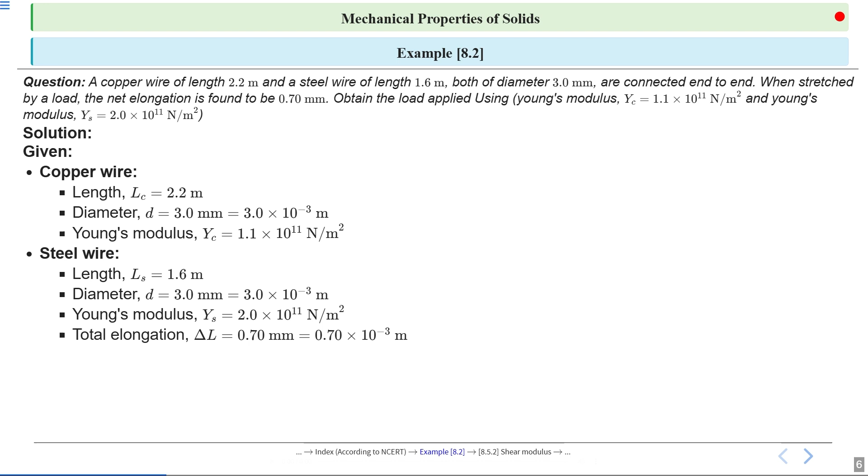Total elongation delta L is equal to 0.70 mm, so in meter it will be 0.70 into 10 raised to the power minus 3 meter. Alright.

So here end to end means the end of the copper wire is connected with end of the steel wire. Alright, end to end connection means both ends of the steel wire and the copper wire are connected to each other. Let's define the force applied to the wires, we will call this F. This is the load that is causing both wires to stretch. It's important to keep in mind that this same force acts through both wires since they are connected in series.

So recall the formula for longitudinal stress. We know stress is defined as force divided by area. So stress is equal to force upon area, where F is the force in newtons and A is the cross-sectional area in square meters. This formula helps us relate the applied force to the internal forces within the wire.

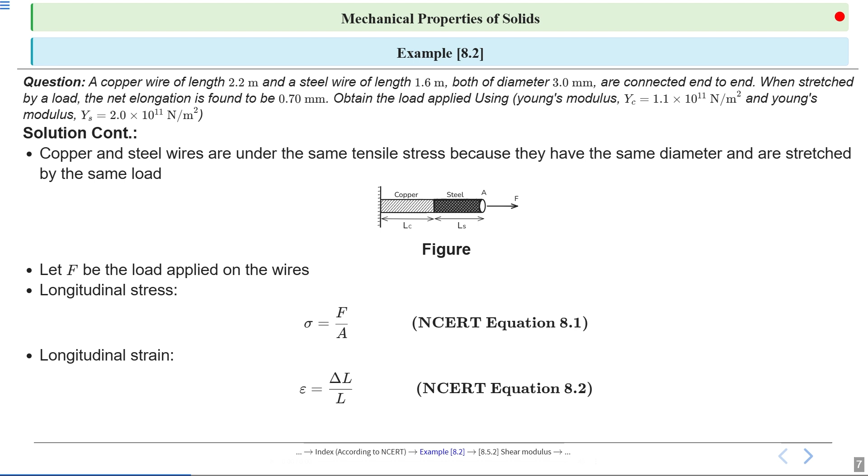Alright, we are continuing with the solution. Cross sectional area A equal to pi into d by 2 whole square. Since both wires have the same diameter, here d is the diameter, so just divide by 2 and put the value, you will get the area.

Substituting the values, A equal to pi into 3.0 into 10 raised to the power minus 3 meter divided by 2 whole square. Solving this, you will get A is equal to pi into 1.5 into 10 raised to the power minus 3 meter whole square.

So solving this, you will get 7.07 into 10 raised to the power minus 6 meter square. This value will be used in the next steps to find the load.

Alright. Now cross sectional area is same for both wires. The ratio of stress to strain is given by stress upon strain is equal to Y. So we have the formula: stress divided by strain equals Young's modulus, or sigma over epsilon.

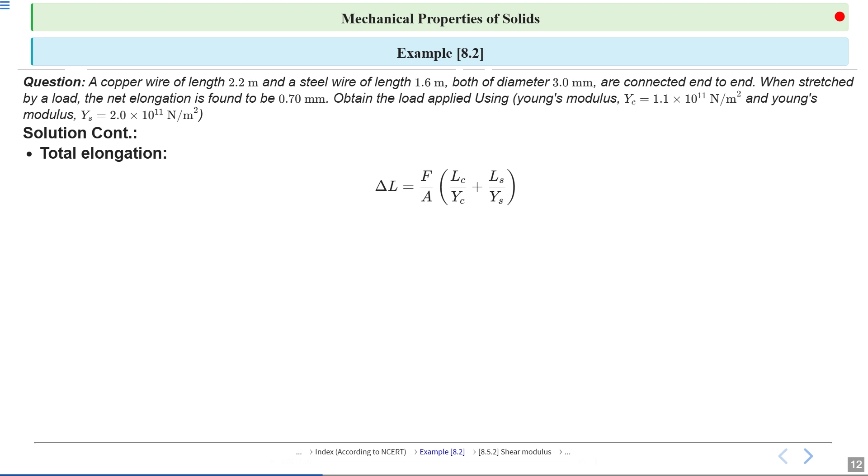Alright, so total elongation delta L is equal to F by A into LC divided by YC plus LS divided by YS. So substitute the values in the above expression and simplify to get the value of F.

So it will be 0.70 into 10 raised to the power minus 3 is equal to F divided by 7.07 into 10 raised to the power minus 6 meter square, into 2.8 into 10 raised to the power minus 11 meter square per Newton.

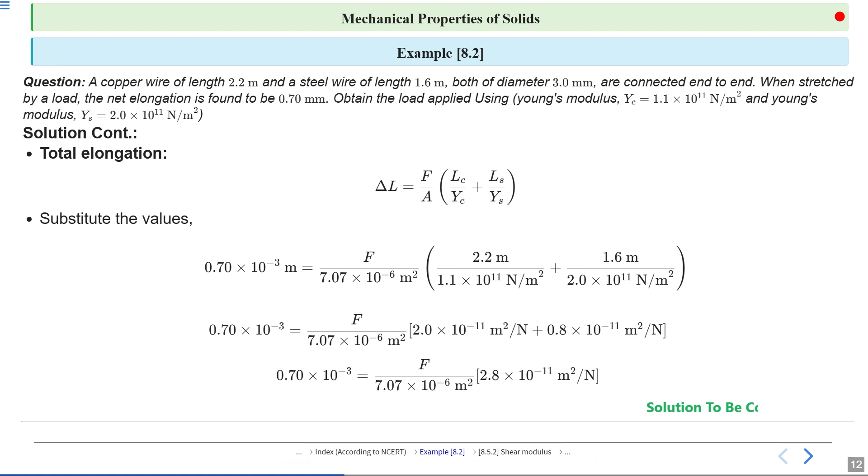Alright. Now let's set up our equation to solve for the load. Here we relate the total elongation, which is 0.70 millimeters, to the force applied. The formula connects the force F, the cross-sectional area of the wires, and the combined effect of both materials' Young's moduli.

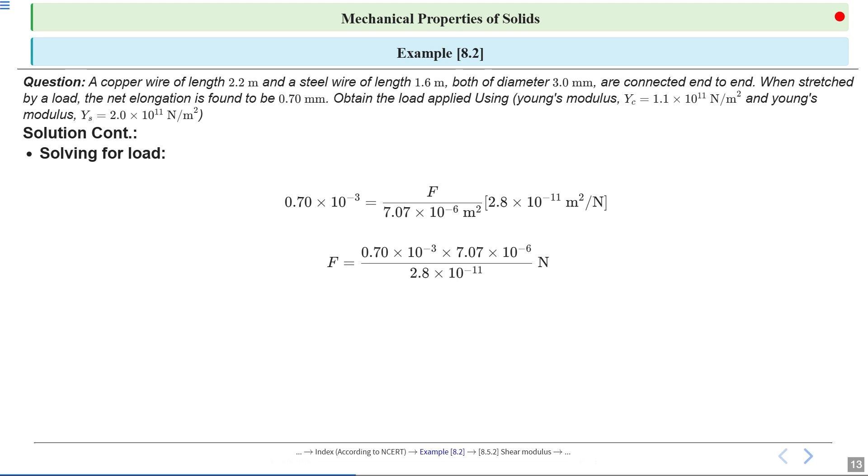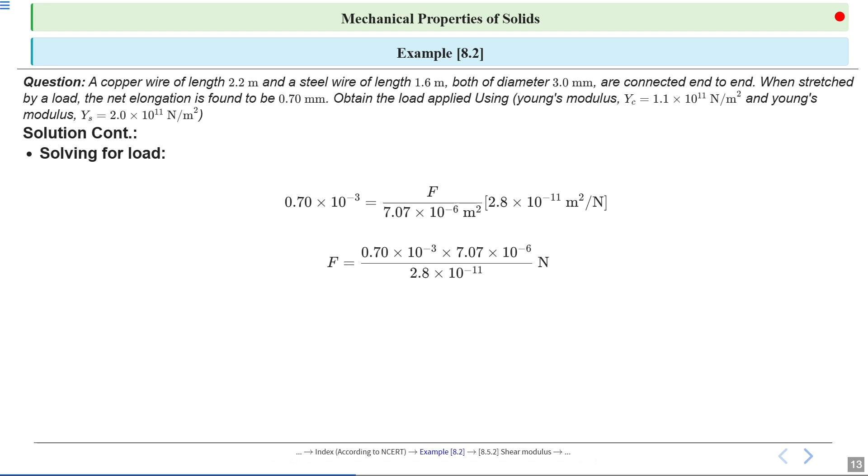So solving this, or rearranging, you will get F. F equals 0.70 into 10 raised to the power minus 3 into 7.07 into 10 raised to the power minus 6, divided by 2.8 into 10 raised to the power minus 11 Newton. So it will be F is equal to 4.449 into 10 raised to the power 2 divided by 2.6. F is approximately equal to 180 Newton. So hence, the load applied is approximately 180 Newton.

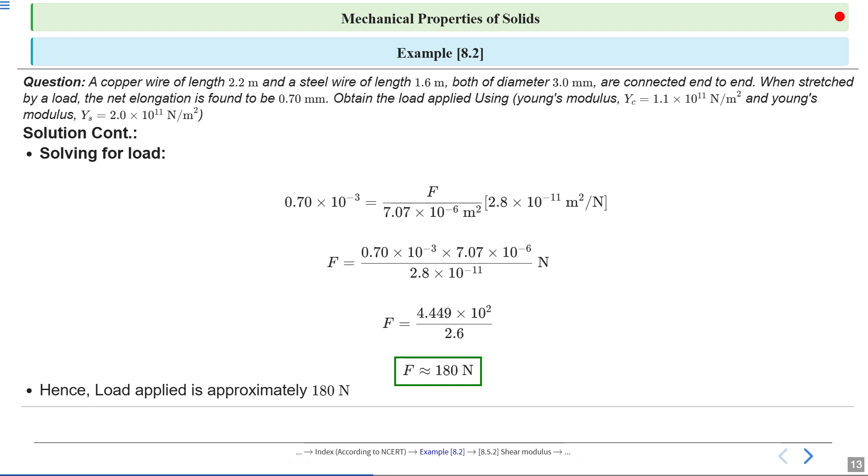Shear modulus. Let's start by defining shear modulus. Shear modulus is a measure of how stiff a material is when it's subjected to forces that try to slide one layer over another. The ratio of shearing stress to the corresponding shearing strain is called the shear modulus of a material. Shear modulus is also called the modulus of rigidity.

Mathematically, we write the shear modulus as G equal to shearing stress sigma s divided by shearing strain. Here G is the shear modulus measured in pascals in SI units, and shearing stress is the force per unit area, also in pascals, and shearing strain is a ratio, so it has no units.

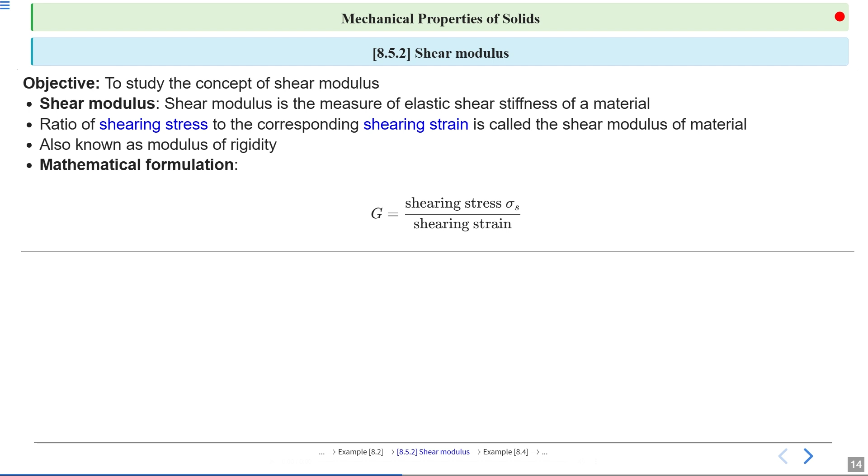Shearing strain measures how much the shape of the object changes due to the applied force. It's calculated as the sideways displacement of the top layer, delta x, divided by the original length L of the object. Shear strain has no units because it's a ratio. When we apply the force on top of the box, it changes the shape, producing the small change delta x.

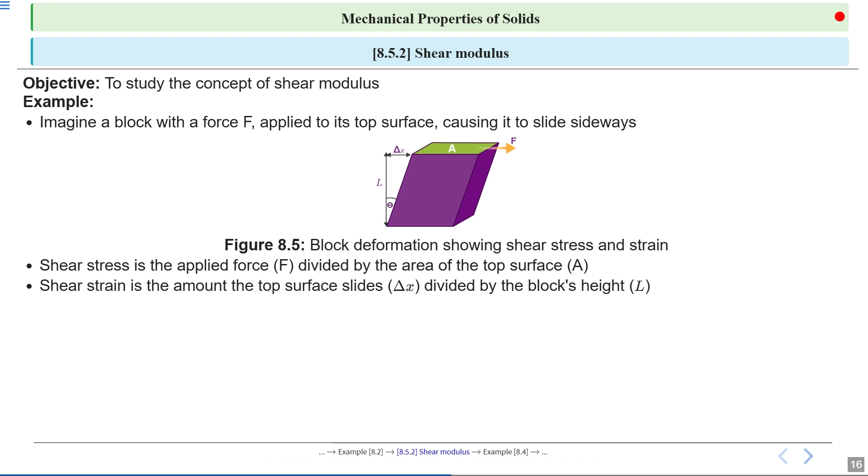Shear stress is defined as the force applied F divided by the area A of the surface where the force acts: shear stress equals F divided by A. If we increase the force or decrease the area, the shear stress increases. Shear strain measures how much the top surface slides compared to the block's height. It's calculated as the sideways displacement delta x divided by the length L, or height L. This gives us a ratio with no units, showing the relative deformation. If the block is taller, the same sideways movement results in less strain.

Shear modulus, represented by G, is the ratio of the shear stress to the shear strain. It tells us how much force is needed to produce a certain amount of sliding. A higher G means the material is more rigid and resists deformation.

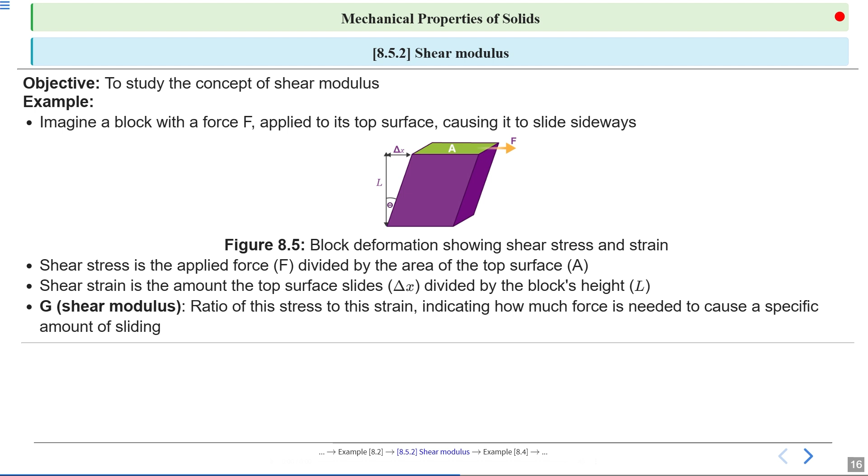Let's look at the formula for shear modulus. The formula will help us quantify how much a material resists being deformed by a shearing force. Shear modulus, represented by the letter G, is defined as the ratio of the shear stress to the shearing strain, so G is equal to shear stress divided by shear strain. Mathematically, G equals sigma s upon gamma.

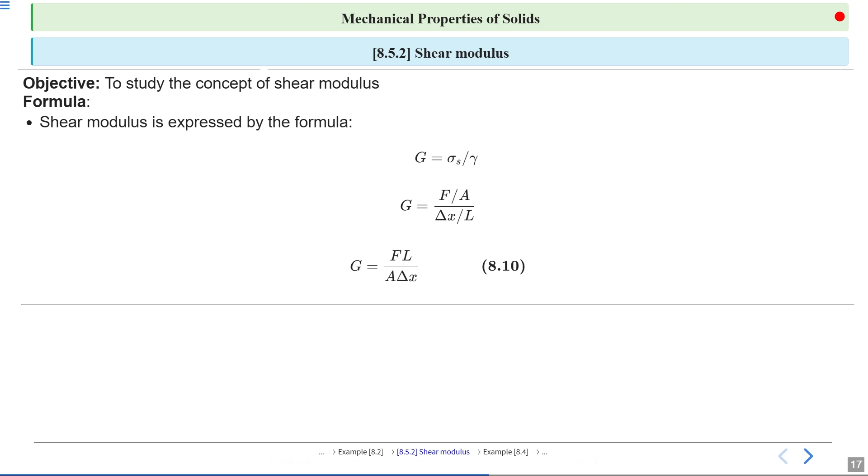So just put the values: G is equal to F by A divided by delta x by L. So G equals FL divided by A into delta x. Now solving for shear modulus.

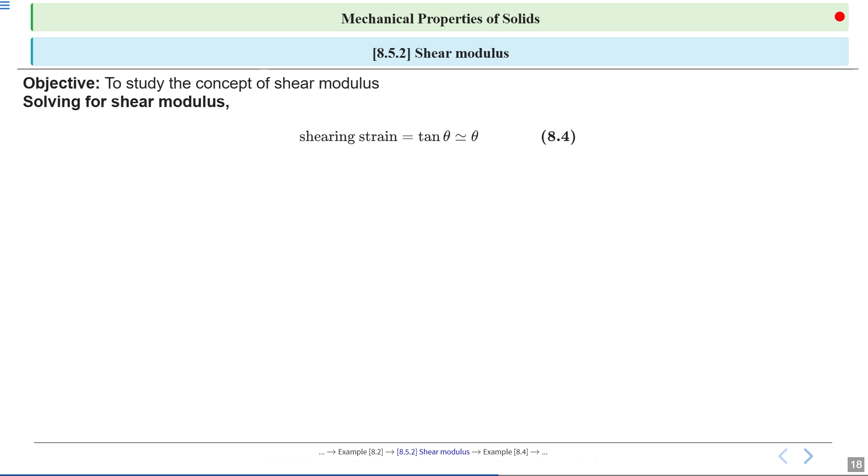Shearing strain is defined as the change in angle theta between two originally perpendicular sides of an object when a force is applied. For small angles, tan theta is approximately equal to theta itself, measured in radians. This approximation makes calculations much simpler and is commonly used in physics when dealing with small deformations. So G equals F by A divided by theta, since shearing stress is force upon area. Finally, we can say the shearing modulus G equals F divided by A into theta. This form makes it clear that increasing the force or decreasing the area or angle will change the shear modulus.

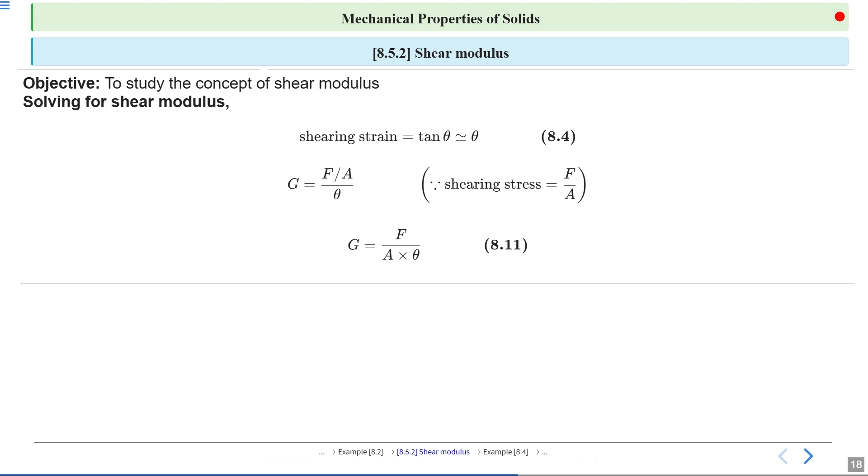So G equals F divided by A into theta, where G is shear modulus. So G equals sigma s upon theta. Shearing stress sigma s can also be expressed as sigma s equals G into theta. The SI units are Newton per meter square, or Pascal. This is the same unit used for pressure and other types of stress.

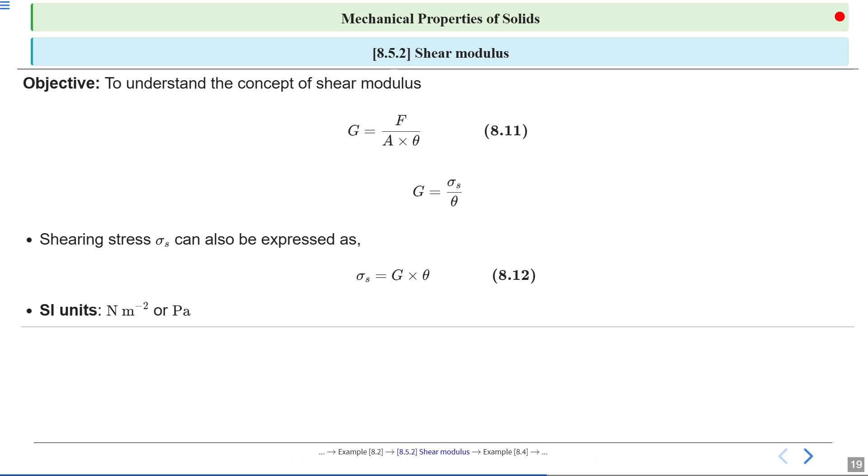Shear modulus G is generally less than Young's modulus. So for most materials, G is approximately Y by 3.

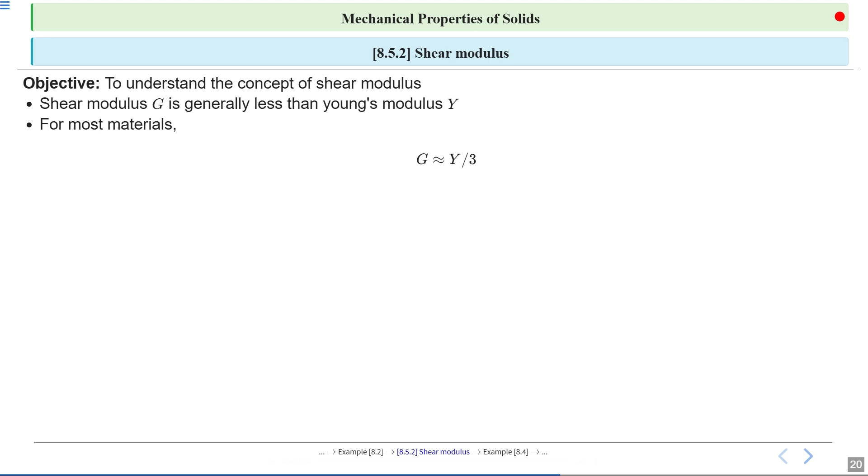Shear moduli of a few common materials are given in table 8.2. Let's see: for material aluminum, brass, copper, glass, iron, and their shear moduli - aluminum 25, brass 36, copper 42, glass 23, and iron 70, with 10 raised to the power 9 Newton per meter square.

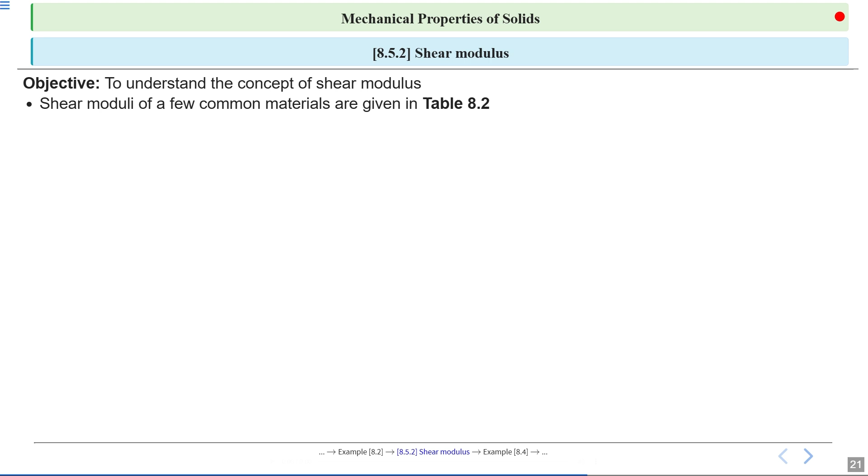Now, shear moduli of a few common materials: lead, nickel, steel, tungsten, and wood. Their values are lead 5.6, nickel 77, steel 84, tungsten 150, and wood 10, all with 10 raised to the power 9 Newton per meter square.

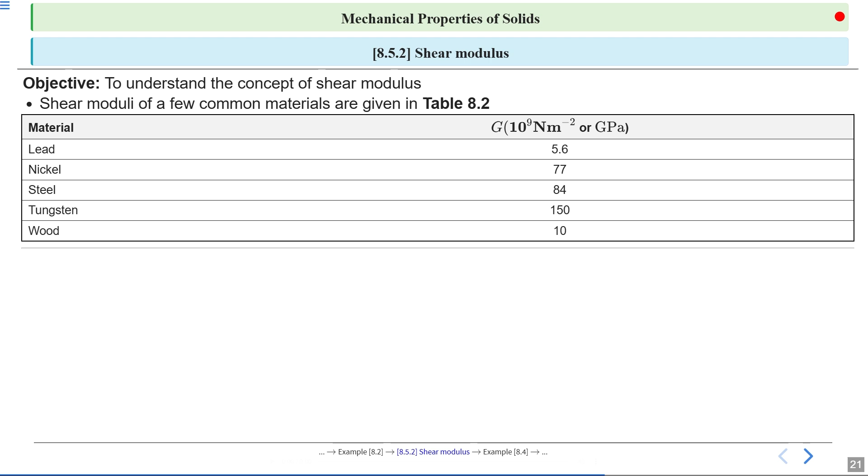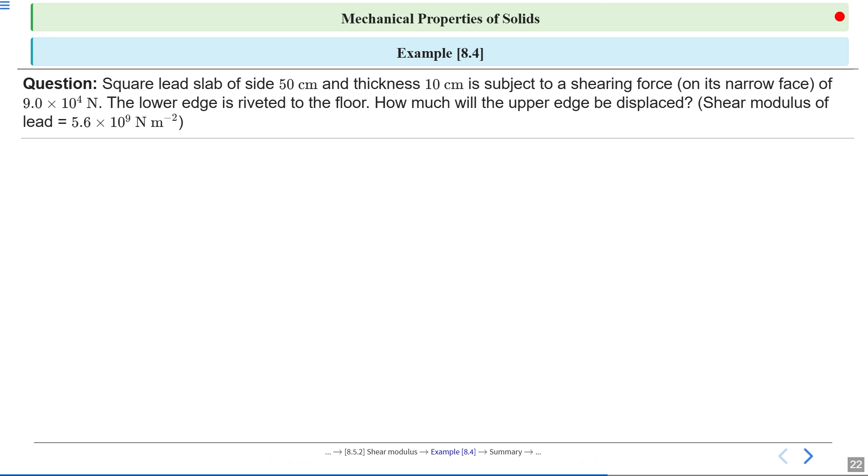Example 8.4. A square lead slab of side 50 cm and thickness 10 cm is subject to a shearing force on its narrow face of 9.0 into 10 raised to the power 4 Newton. The lower edge is riveted to the floor. How much will the upper edge be displaced? Shear modulus of lead is equal to 5.6 into 10 raised to the power 9 Newton per meter square.

So here, the given terms: side of the slab is 50 centimeter, or in meter it will be 0.5 meter, and thickness T equal to 10 centimeter, in meter it will be 0.1 meter, and shearing force F equal to 9.0 into 10 raised to the power 4 Newton, and shearing modulus G equal to 5.6 into 10 raised to the power 9 Newton per meter square.

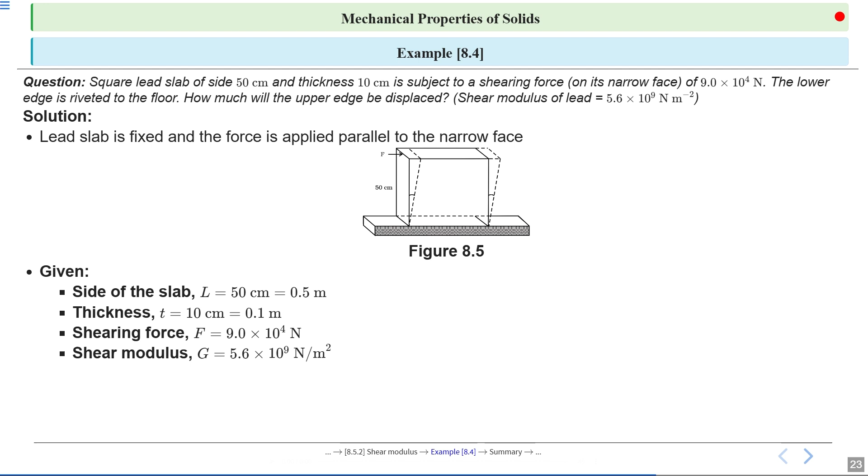Alright. So area of the face parallel to which this force is applied is A equal to L into T. So just put the values 0.5 into 0.1 meter. Solving this, you will get 0.05 meter square.

Now use the formula for shear modulus, G equal to FL divided by A into delta X. So delta X is equal to FL divided by AG.

So substitute the values and calculate. So delta X is equal to 9.0 into 10 raised to the power 4 Newton into 0.5 meter, divided by 0.05 meter square into 5.6 into 10 raised to the power 9 Newton per meter square. Solving this, you get 9.0 into 10 raised to the power minus 4 divided by 5.6. So delta X equal to 1.61 into 10 raised to the power minus 4 meter.

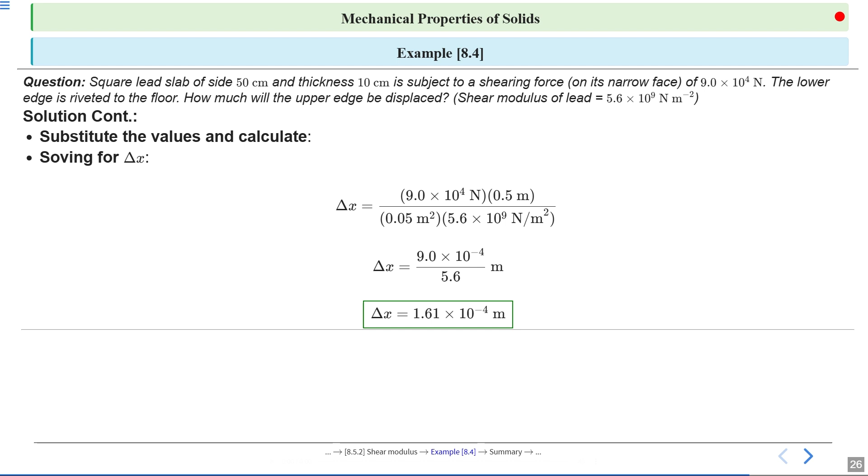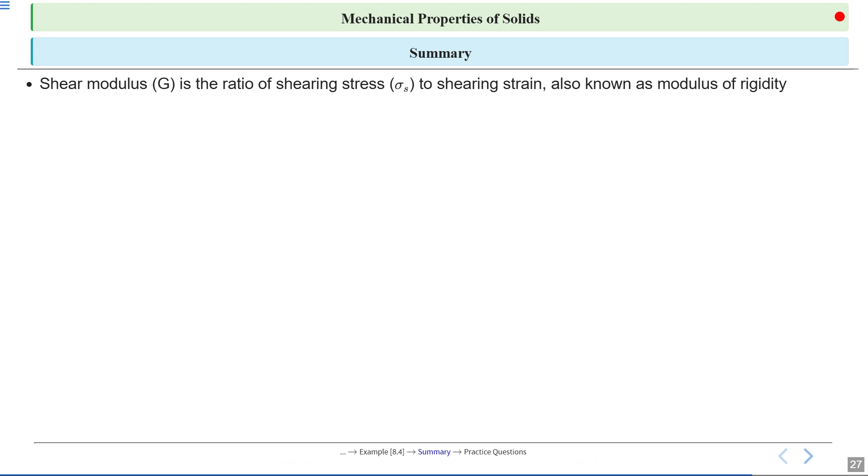Students, now we are discussing summary. So shear modulus is the ratio of the shearing stress to the shearing strain, also known as modulus of rigidity. For a wire under load, total elongation is the sum of the individual elongations of the different segments: delta L is equal to delta L1 plus delta L2.

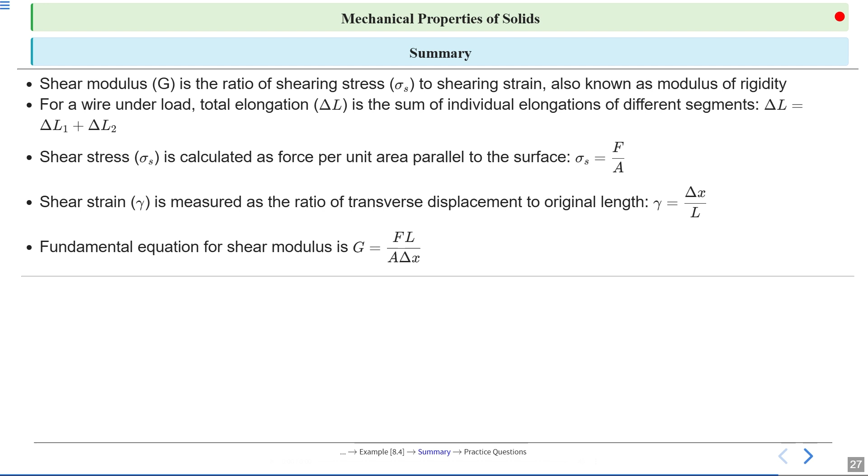Shear stress is calculated as force per unit area parallel to the surface: sigma S is equal to F by A. Shearing strain is measured as the ratio of the transverse displacement to the original length, delta x by L. Fundamental equation for shear modulus is G equal to FL divided by A into delta x.

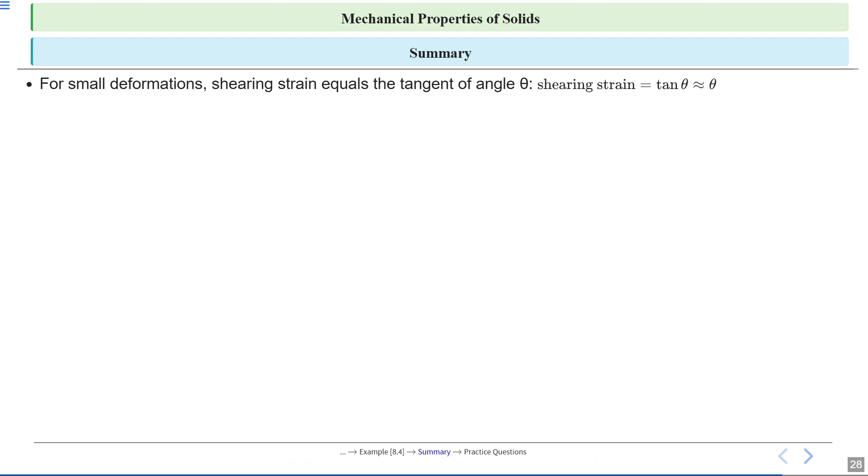For small deformations, the shearing strain is simply the tangent of the angle theta, which is the angle by which the shape is distorted. Shearing stress can be expressed as sigma s is equal to G into theta, where G is the shearing modulus. SI unit of shearing modulus is pascals or Newton per meter square. Shearing modulus is approximately 1/3 of Young's modulus, Y by 3.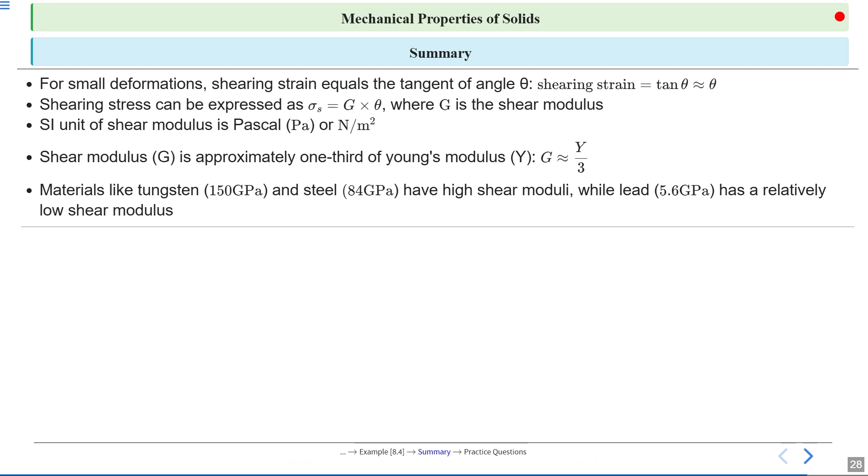Materials like tungsten and steel have higher shear moduli, while lead has a relatively low shear modulus.

Now we have practice questions. First, if a force of 100 Newton applied to a surface area of 0.02 meter square causes an angular deformation of 0.01 radian, calculate the shear modulus. A material has a shear modulus of 30 into 10 raised to the power 9 Pascal. What shear stress is needed to produce a shear strain of 0.002?

If Young's modulus of a material is 90 gigapascal, what would be its approximate shear modulus using the relation? Calculate the shear strain when a shear stress of 5 into 10 raised to the power 6 Pascal is applied to the steel.

A rectangular block experiences a transverse displacement of 0.5 mm when its top surface of area 100 cm square is subjected to a force of 1000 Newton. If the height of the block is 10 cm, find its shear modulus. Alright, thank you for your attention.